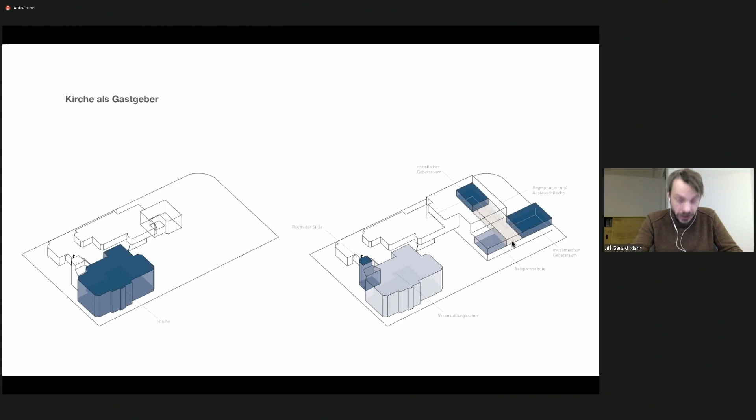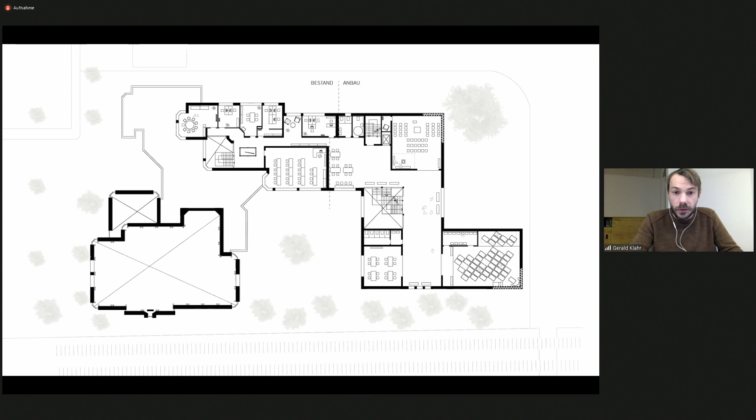This is another floor plan. You can see the various buildings and the spaces of encounter in between. If you look at the sketch, these connecting zones are quite large, and this was really about having enough space for encounter. These are various scenarios of how these rooms can be used in a multifunctional way.

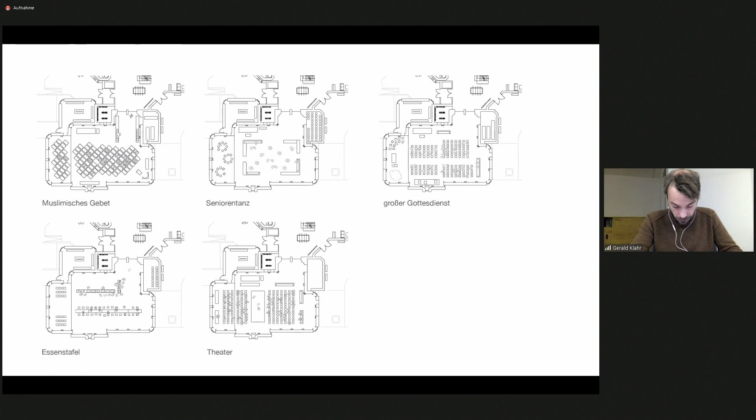The second project was in a way similar, but realized differently. We called it the interreligious campus. This is the original church building, supplemented with a multi-religious room called a hospitality room for various world religions. These two spaces form an axis of religion, and there is a second, more cultural axis. In between is an exterior space meant for encounter and sharing.

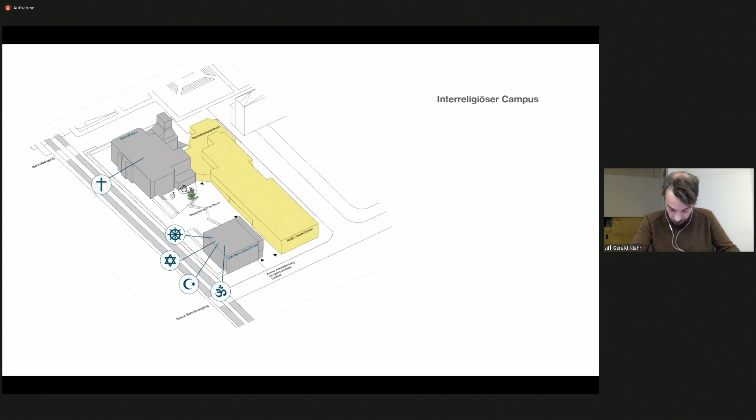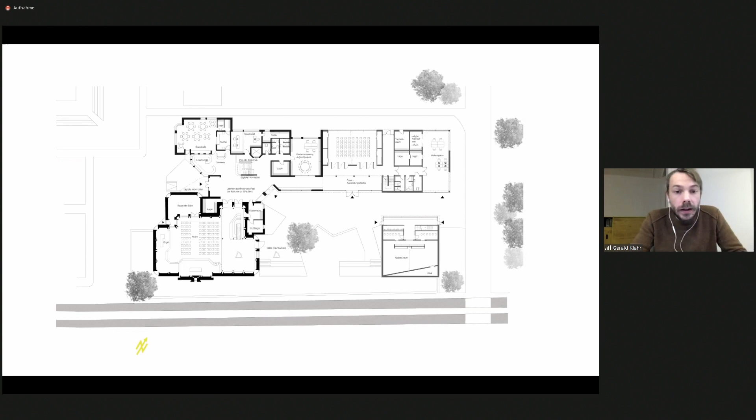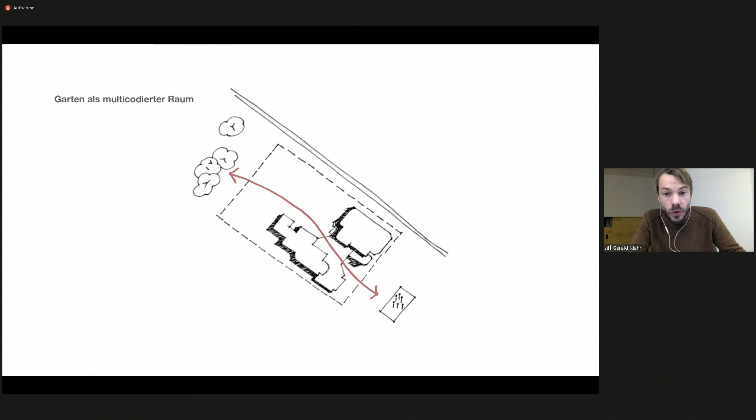The third project dealt with the garden of the community hall, designing a multi-coded space. What's remarkable is that this foyer, which everyone involved saw as the great quality, was actually decided by the students to be demolished and replaced with exterior spaces under this yellow roof. They said this foyer actually resulted in a separation of the buildings, that it's just separated and people do not connect. If you open it up, you get more connection between the church hall and the original church building, and in this way better connections within this quarter, this neighborhood.

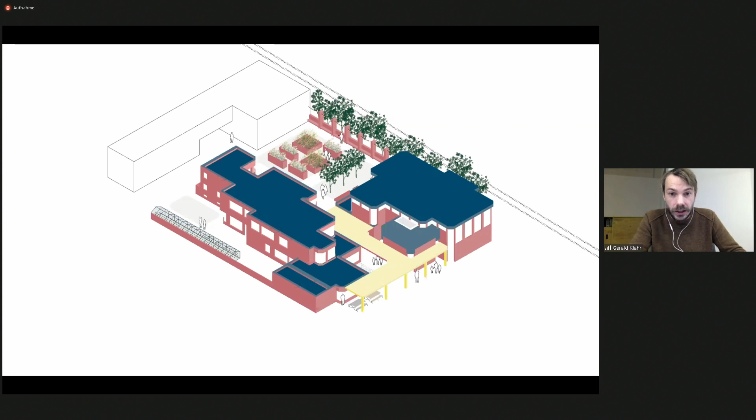This is supplemented by some minor changes to the buildings that are already there, just to improve their quality. For example, the former worship room has been changed to a multifunctional room in order to use it for other events.

Then you see the garden here, which also acts as a connection between the two sides, to connect the people and the various rooms and spaces.

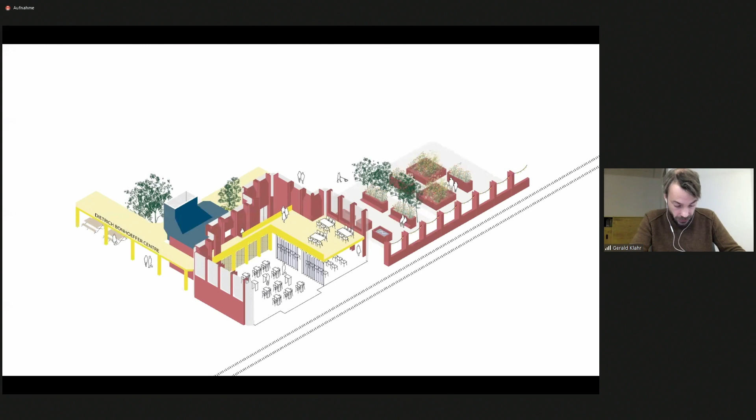And once more, you can see the small chapel, which has also been improved and can now be used as a chapel, as a worship room. It's another example of these minimal changes that have been done.

Jan, I would hand the floor back to you.

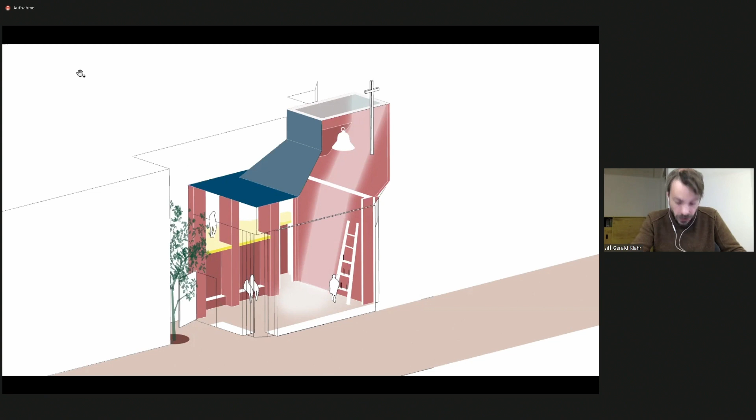Yes, I would like to add a couple of things from a theological perspective. Maybe you can go back to the other image. And then we'll come back to the tasks.

So there are three things I would like to mention. First of all, as a theologian, we were able to remind the architects that religion is not just service, it's not just about worship. It's also an individual use of holy spaces for prayer, maybe just to light a candle, maybe just to calm down. Religious practice also involves education, small groups, choirs, drama groups. These are all other religious practices, not just the big service. So from this perspective, religion is something you do individually.

And this has to be included into our designs, to have a multi-religious room that can be used between the foyer and the marketplace. At the moment, this room is being used as a storage space. So the roots for this new room of silence are, of course, in religion. And so we have this theological contribution to make.

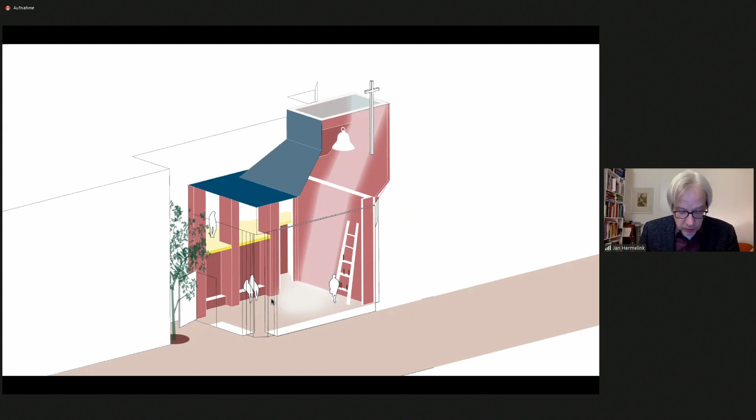Secondly, for all of us, it was surprising that most of the designs you have seen actually want to include and invite other religions, and even give them spaces to themselves. But it was important for us theologically that this opening towards other religions is not justified by the point that the Muslims don't have enough space for their prayers, but that this interreligious hospitality can even be justified by religious traditions in the Judeo-Christian tradition. So we used examples from our tradition of opening up towards other religions, and then we thought about how we can implement this in architecture, by an integrative cafe, for example.

And the third point is the relationship between religious and cultural practice. You've seen this before, there's the cultural axis and the religious axis. You can separate the two in some designs, but it still goes back to Dietrich Bonhoeffer, after whom this complex is named.

He said church has to be church for others. Church has to be with others and for others in the everyday life of their people, in their encounter, in their coming together and helping each other. In this practice together, it becomes clear what it means that Jesus Christ, the Son of God, has become a human being.

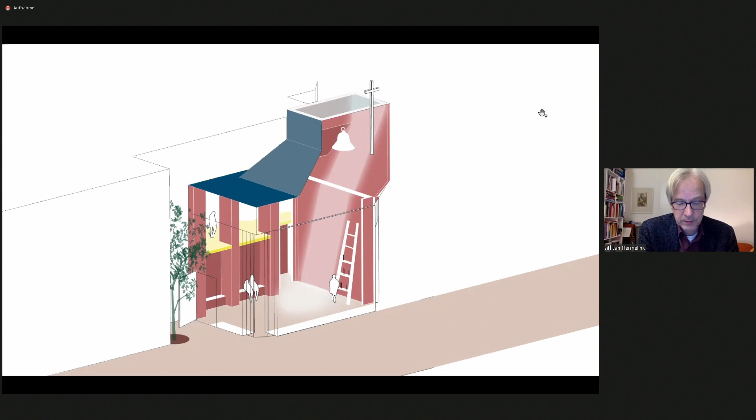And this is exactly what you see when you go back to the community hall, the church hall - that's the basic idea of the building itself. Here we can see it again: everyday life and church, everything is connected. Prayer and diaconia, everyday life, it's all together in one building. We want to have a mix, rooms and spaces that can be used in various ways and connect these two aspects.

Let's get back to the question that theology students have to deal with. So what's our contribution from the field of theology to the design process? What is our contribution? How can we make this visible?

The theologians were important in the teams because they had their religious knowledge. So what do we need in a church? What do we need in a mosque or in a synagogue? What kind of events take place in a sacred space? The theologians also thought about the perspective of the users, both the users at the moment, but also the future users of these spaces.

So it could be that the Christian users may have a bit of a problem with the idea that there is just a general purpose prayer room. And we try to explain why this oasis has to be a nice landscape with a baptismal font and some benches, where it's so important for all these congregation members.

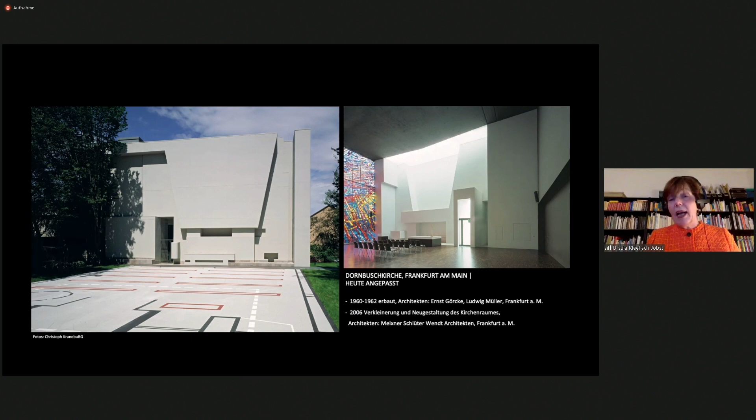Another example is in Frankfurt. This church was too big, so it was cut in half. The total length is still being used—it has been turned into a public place for the neighborhood, which has a very important role to play.

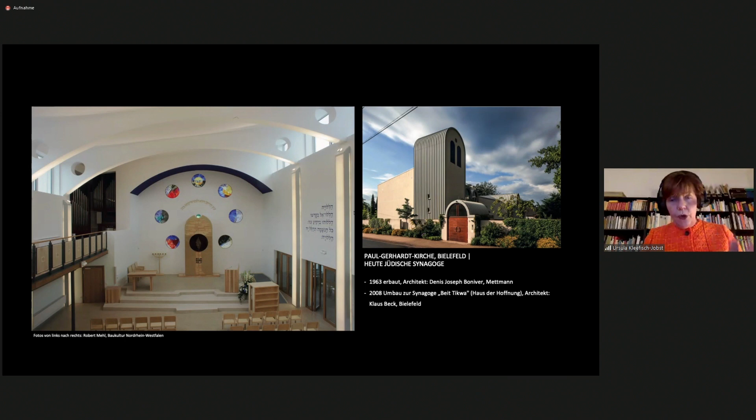What happens to the interior of the church? I think the visitors were already quite well prepared in the first part. Just two more examples: the Paul Gerhardt Church in Bielefeld is now a synagogue, and there weren't that many changes in the interior—this was very much unchanged.

Then I already mentioned the church that is now a mosque. Maybe one more example of St. Bernardus in Oberhausen—this church has been separated. One part is still a chapel, the other has become a restaurant, used for gastronomy and events. This is an example where many things were changed in the interior. This is now a publishing house inside, and of course you need office space within this church.

So, last question: what do we do with the inventory? That's very interesting. When you have a new purpose for the church, what do you do with your organ, for example, or with the pews? It's oftentimes very artistic, has a high value, and now we have found a different use for these things.

Let me rush through our last point. I can invite you to our website—it's a very complex website for our project with more information. This is not so much about giving you good examples of reuse, but to give congregations the opportunity to ask themselves what they need to take into account in their process: legal aspects, church law, architecture, who needs to be involved. Maybe you have time to look at this afterwards on the website—you will find much more information regarding this.